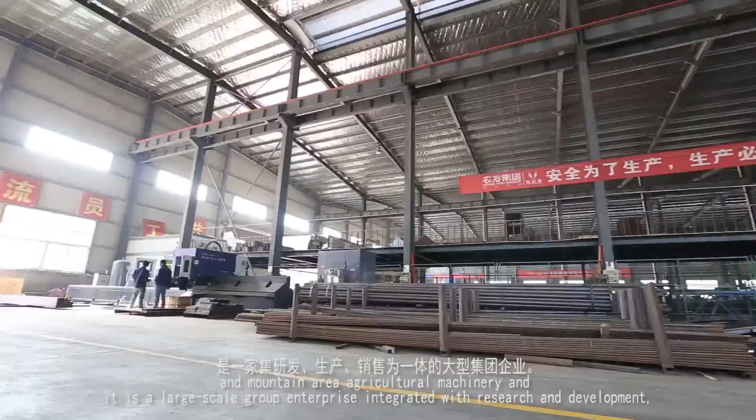Hunan Nongyou Machinery Group Company Limited is located in Shuangfeng County, Loudi City with beautiful landscape, a remarkable place with outstanding people, the hometown of generations of talents such as Zeng Guofan and Cai Hesen. Established in 1995, the company is positioned in hilly and mountain area agricultural machinery, and it is a large-scale group enterprise integrated with research and development, production and sale.

4 subsidiaries such as Nongyou Company Limited and Nongyou Shantai are incorporated under the group. An average annual sales revenue in recent 3 years keeps a growth of 30% or so.

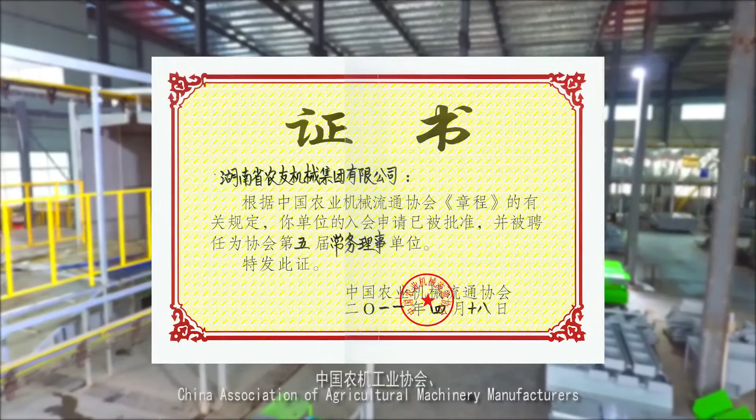Nongyou Group is a key enterprise in Hunan agricultural industry, key new high-tech enterprise of National Torch Plan, an enterprise for demonstration of National Industrial Enterprises brand cultivation, a member of State Agricultural Machinery Standardized Committee, and executive member of China Agricultural Mechanization Committee, China Association of Agricultural Machinery Manufacturers, and China Agricultural Machinery Distribution Association.

On New Year's Day of 2012, Liu Ruoqiao, president of Hunan Nongyou Machinery Group Company Limited, was invited to participate in Economic Operation Forum convened at Shantan and presided by Premier Wen Jiabao as the only representative of Hunan Agricultural Machinery Enterprises.

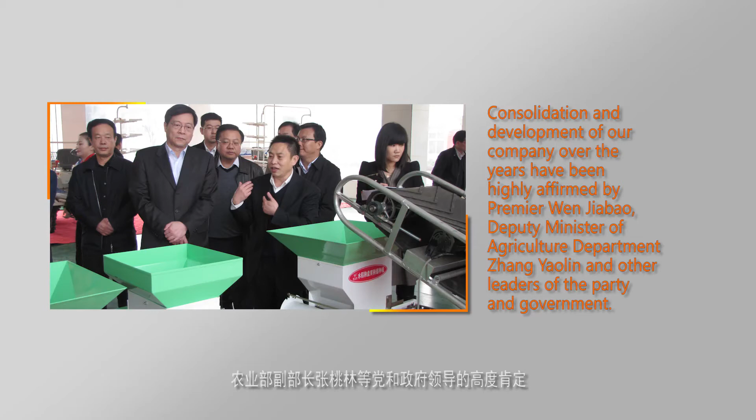Consolidation and development of our company over the years have been highly affirmed by Premier Wen Jiabao, Deputy Minister of Agriculture Department Zhang Yaolin, and other leaders of the party and government.

A good fortune, trademark of the company, was rated as China Famous Brand in 2012, and the product has won Hunan Product Quality Award, Hunan Famous Brand, and other honors.

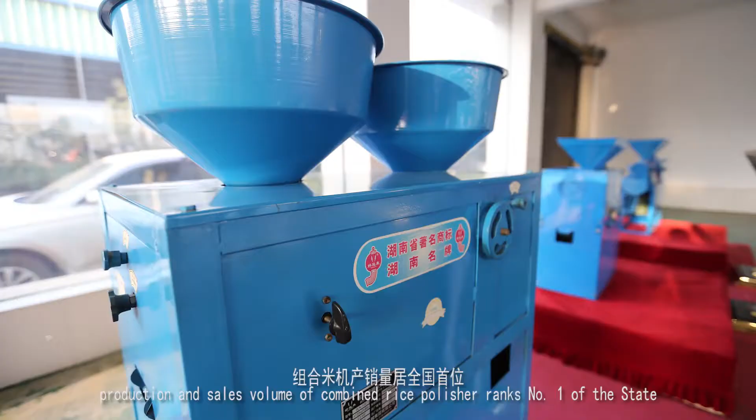The products are sold well in over 20 provinces and cities, as well as Vietnam, Thailand, Burma, Malaysia, Laos, and other countries and regions. Production and sales volume of combined rice polisher ranks #1 of the state, and production and sales volume of dryer and harvester ranks #1 in the province.

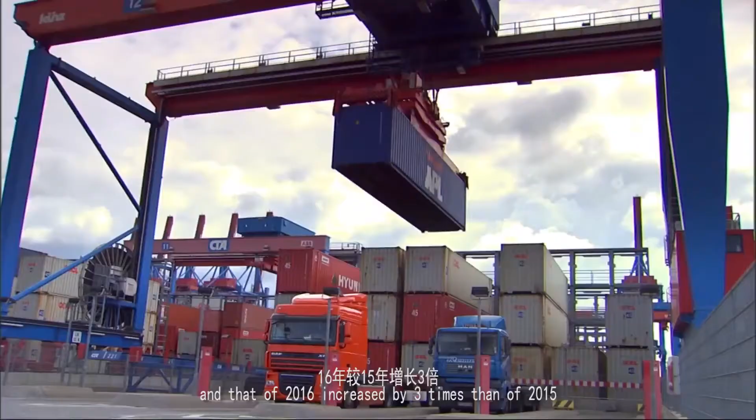Product export achieves great leap forward development. Export sales increased by 10 times in 2015, and that of 2016 increased by 3 times that of 2015, in excess of $10 million, wherein self-support export was of $6 million.

Technical Center of the company is certified as State-Level Enterprise Technical Center, National Worker Pioneer, and one of the Enterprise Science and Technology Entrepreneur Team of Hunan Province, and the subsidiaries of Nongyou Company Limited and Nongyou Shantai are both new high-tech enterprises of Hunan Province.

As of the end of 2016, the company owned 109 national patents, wherein 25 patents for invention, led or participated in formulating 2 national standards and 7 industrial standards.

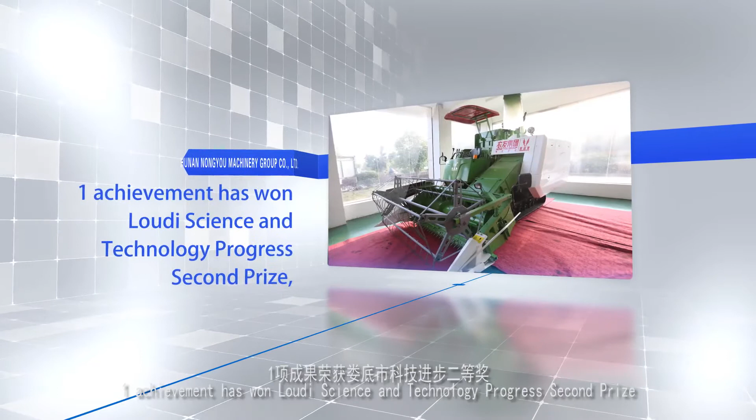32 technologies have passed national achievement authentication, wherein 8 have reached domestic advanced level, 2 have filled the domestic gap, 2 achievements have won Hunan Science and Technology Progress second prize. 1 achievement has won Loudi Science and Technology Progress second prize. 2 achievements have been listed into Hunan Industrial Area 100 Major New Products Boosting Plan projects. 4 technologies have been listed into the Guide Directory of Hunan Strategic Emerging Industry Major Key Common Technology Development.

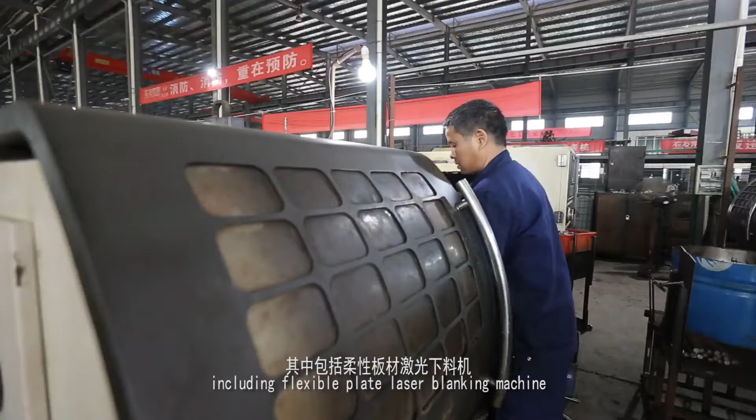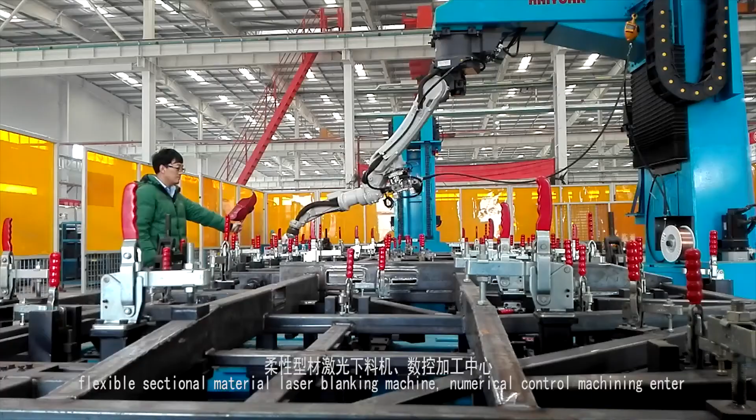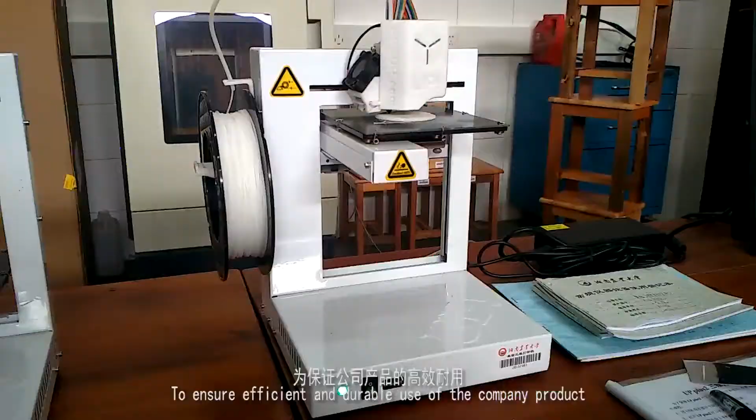The company possesses over 500 sets of high-end advanced production equipment, including flexible plate laser blanking machine, flexible sectional material laser blanking machine, numerical control machining center, flexible robot welding system, environmental spraying production line, flexible general assembly production line, and other equipment. To ensure efficient and durable use of the company product, the company has jointly built metallographical 3D printing and model verification laboratories.

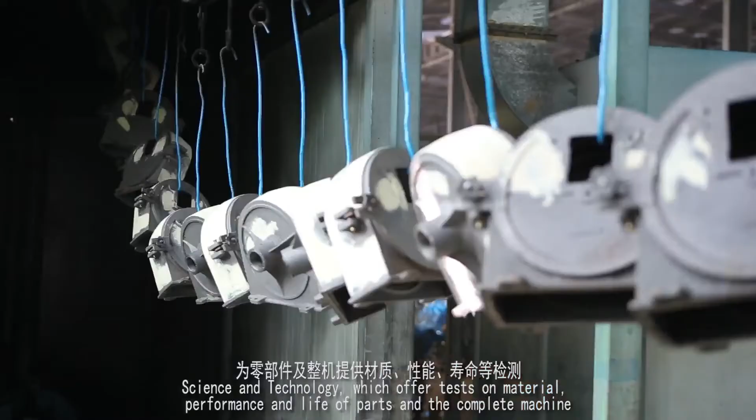Mechanic structure, reliable life, and other laboratories were jointly built with Agricultural University of Hunan and Hunan University of Humanities, Science and Technology, which offer tests on material, performance and life of parts, and complete machine.

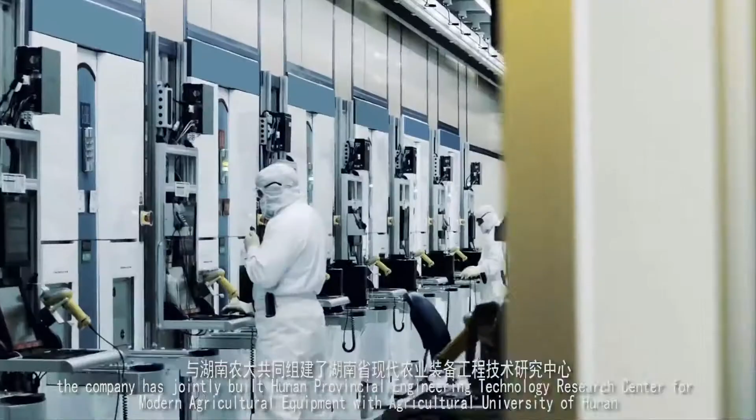Insisting in university-industry cooperation, the company has jointly built Hunan Provincial Engineering Technology Research Center for Modern Agricultural Equipment with Agricultural University of Hunan, and led to establishment of Hunan Loudi Agricultural Machinery Technology Innovation Strategy Alliance, and set up a close cooperative relationship with Chinese Academy of Agricultural Mechanization Sciences, South China Agricultural University, Hunan University, Agricultural University of Hunan, Central South University of Forestry and Technology, Agricultural Machinery Identification Station of the province, and other colleges and universities and scientific research institutions.

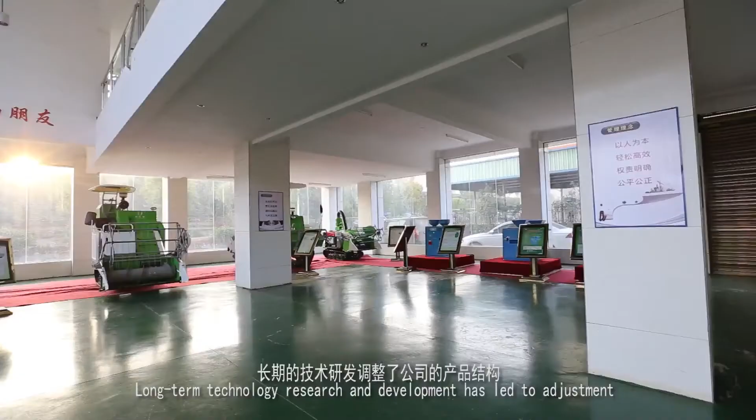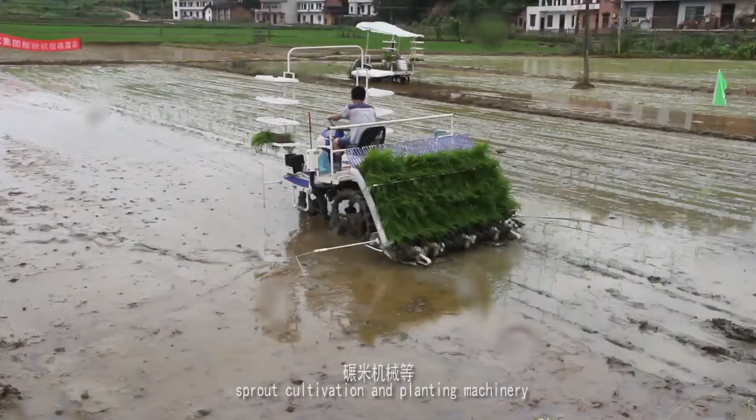Long-term technology research and development has led to adjustment of product structure of the company and has formed mechanized series products covering whole course of rice such as farming machinery, sprout cultivation and planting machinery, harvesting machinery, drying machinery, rice milling machinery.

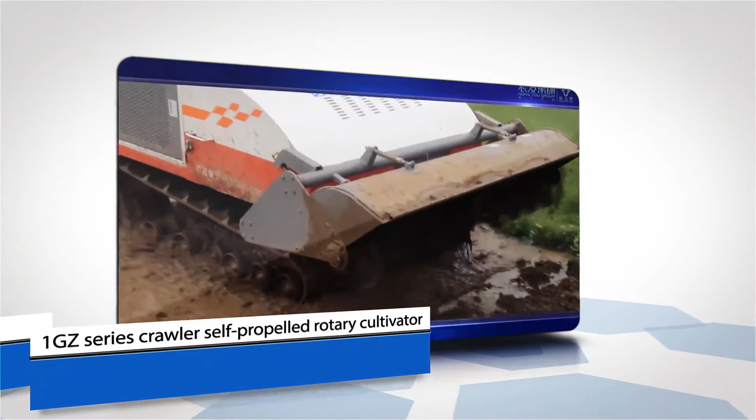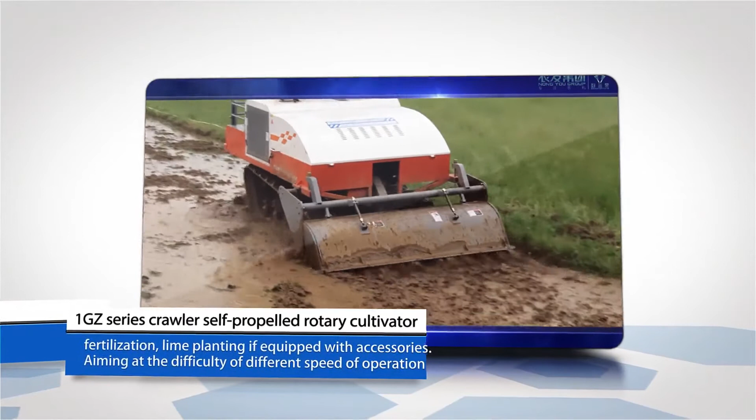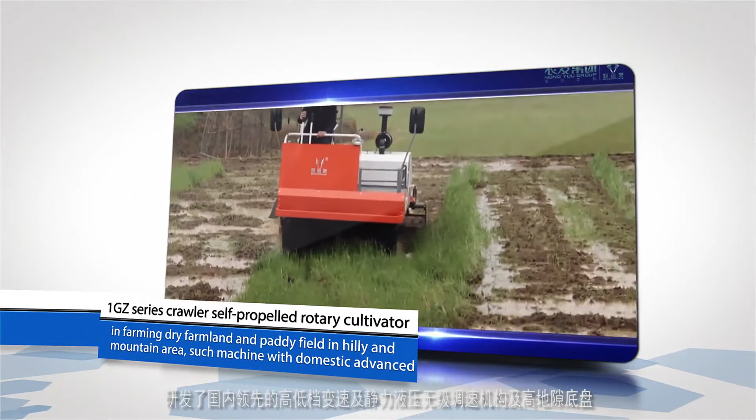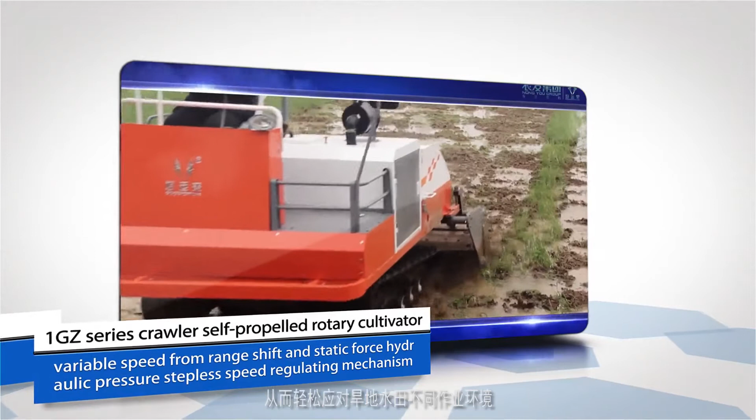The 1GZ series crawler self-propelled rotary cultivator is mainly used for reclamation, weeding and grassland regeneration farming of paddy field and dry farmland, and it is available for operations of ditching, riding fertilization, and lime planting if equipped with accessories, aiming at the difficulty of different speed operations in farming dry farmland and paddy fields in hilly and mountain areas. Such machine, with domestic advanced variable speed range shift and static force hydraulic pressure stepless speed regulating mechanism...

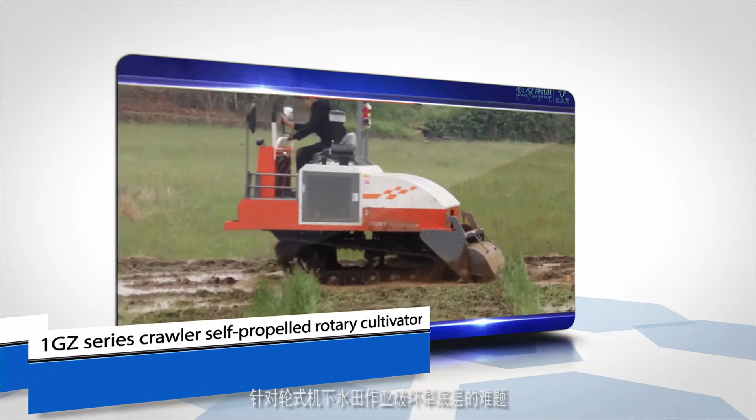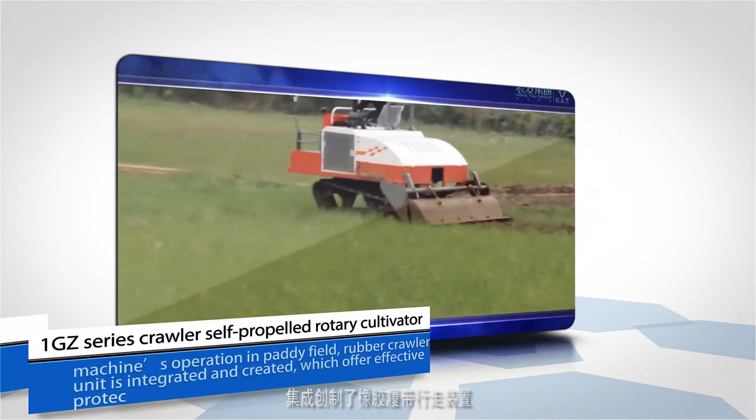...and high ground clearance chassis is developed, so that different operation environments of dry farmland and paddy field can be easily dealt with, aiming at the difficulty of plow pan being damaged from wheel-type machine operation in paddy field. A rubber crawler unit is integrated and created, which offers effective protection on the plow pan.

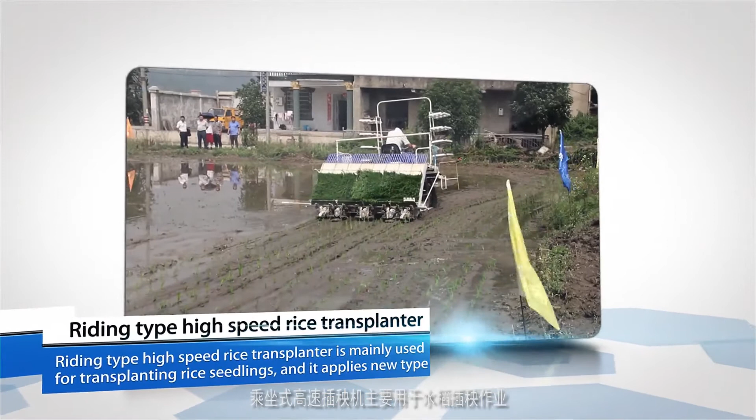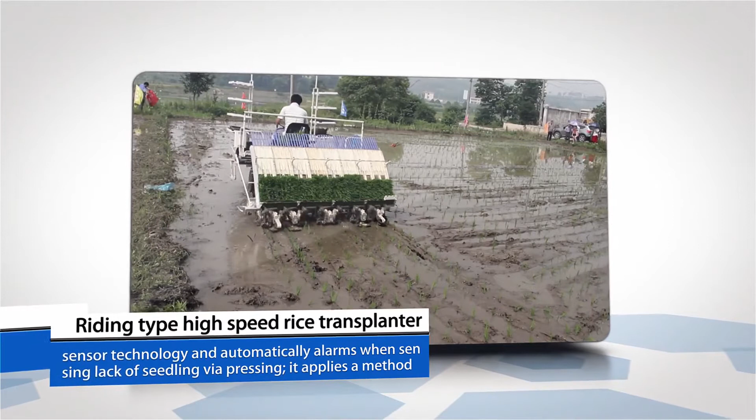The riding-type high-speed rice transplanter is mainly used for transplanting rice seedlings, and it applies a new type of sensor technology and automatically alarms when sensing lack of seedling via pressing. It applies a method combining movement and fluid simulation.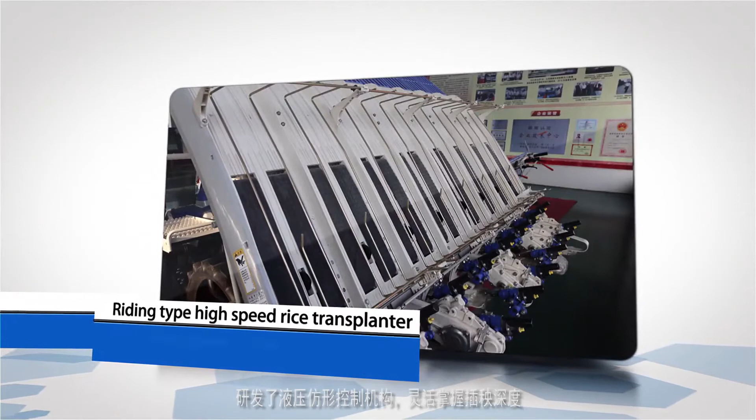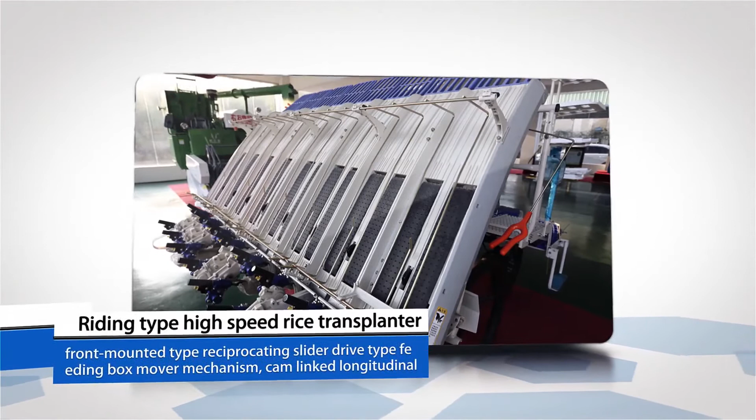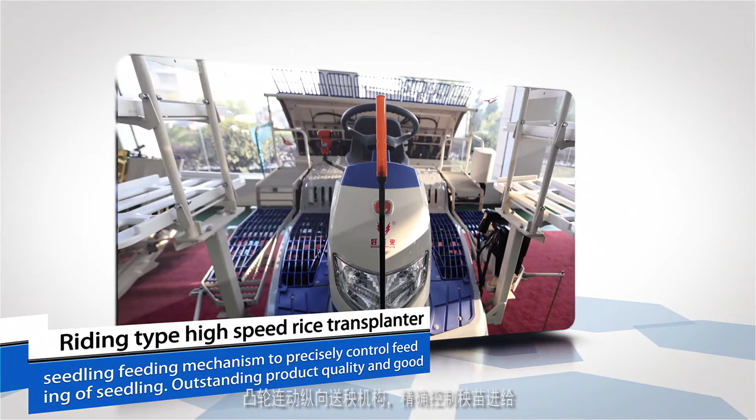A hydraulic copying control mechanism is developed to flexibly master rice transplanting depth. It applies a movement simulation design method and is equipped with a front-mounted type, reciprocating slider, drive-type feeding box mover mechanism, and cam-linked longitudinal seedling feeding mechanism to precisely control feeding of seedling. Outstanding product quality and good product performance are very suitable for large area operation.

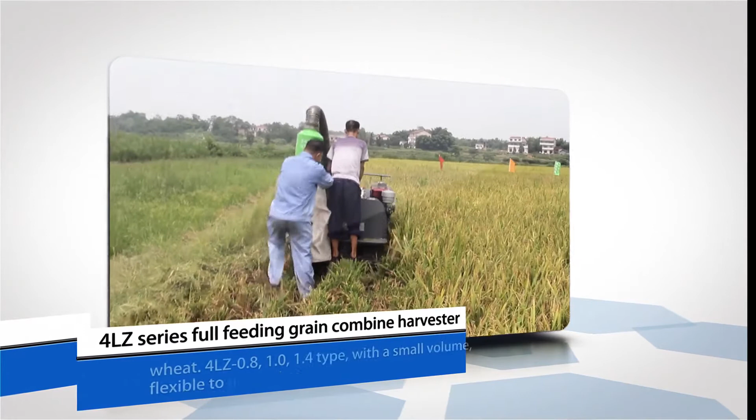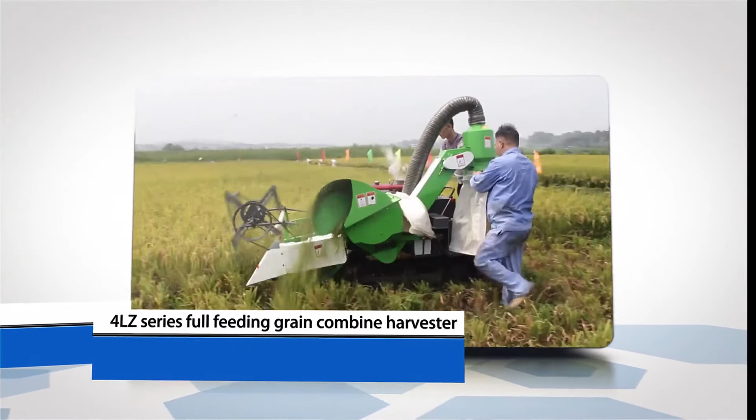The 4LZ series full-feeding grain combined harvester is mainly used for operation of harvesting rice and wheat. The 4LZ 0.8, 1.0, 1.4 types, with small volume, flexible to use and convenient to transfer, are very suitable for operation in small parcels of rice field in hilly and mountain areas.

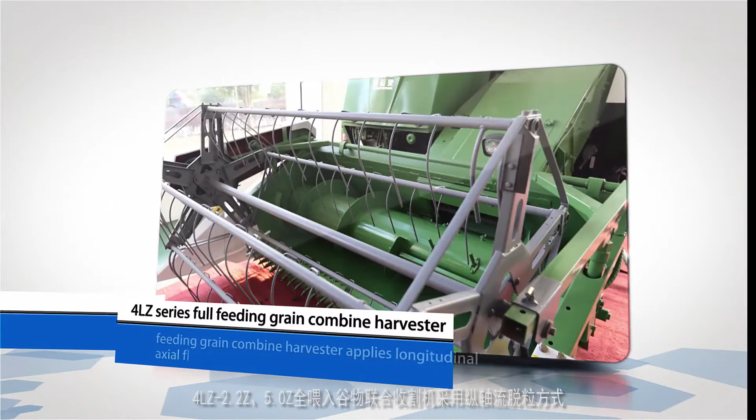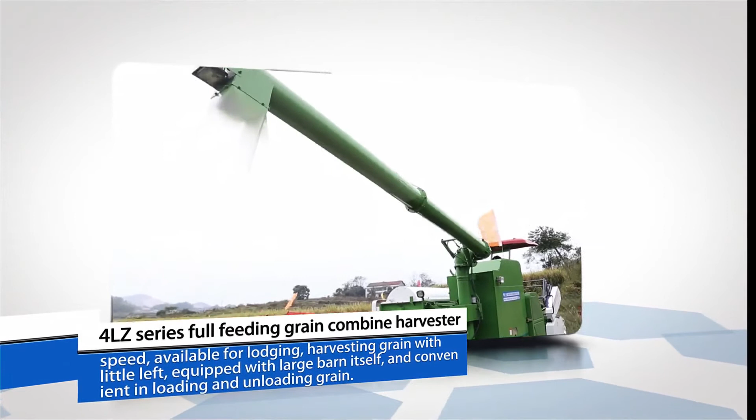The 4LZ 2.2Z 5.0Z full-feeding grain combined harvester applies a longitudinal axial flow threshing method with fast harvesting speed, available for lodging, harvesting grain with little left, equipped with a large barn itself, and convenient in loading and unloading grain.

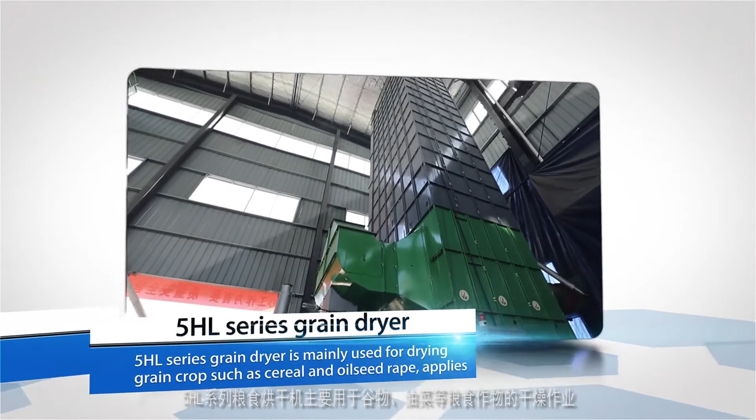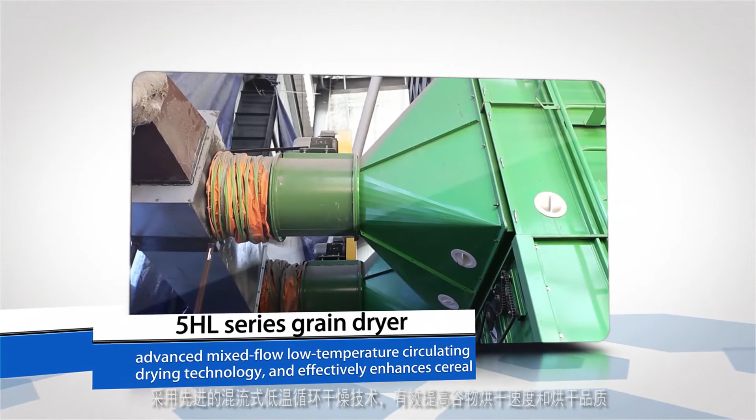The 5HL series grain dryer is mainly used for drying grain crops such as cereal and oilseed rape, applies advanced mixed flow, low temperature circulating drying technology, and effectively enhances cereal drying speed and drying quality.

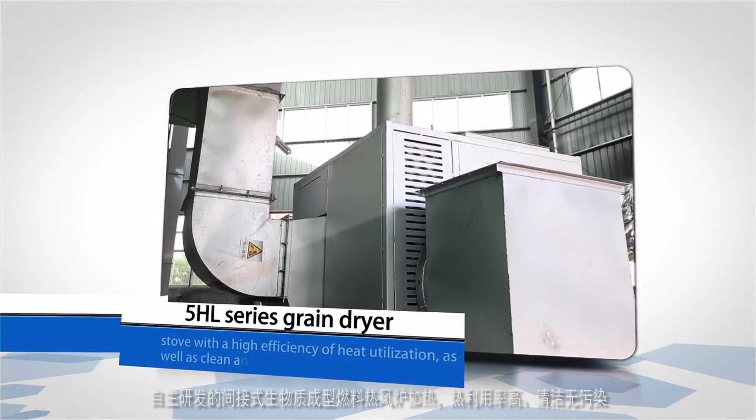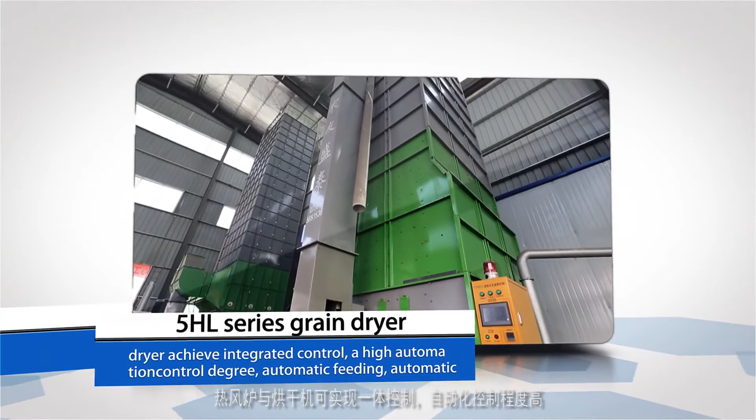Heated by self-developed indirect type biomass briquette hot blast stove with high efficiency of heat utilization, as well as clean and pollution-free operation, the hot blast stove and dryer achieve integrated control with a high degree of automation: automatic feeding, automatic temperature control, automatic drying, online supervision, and unattended operation.

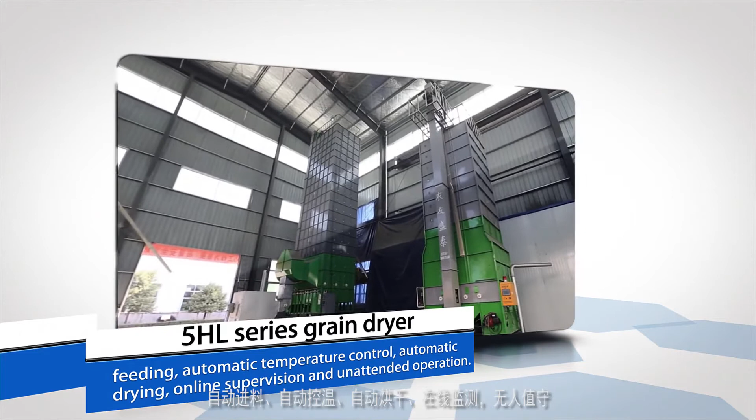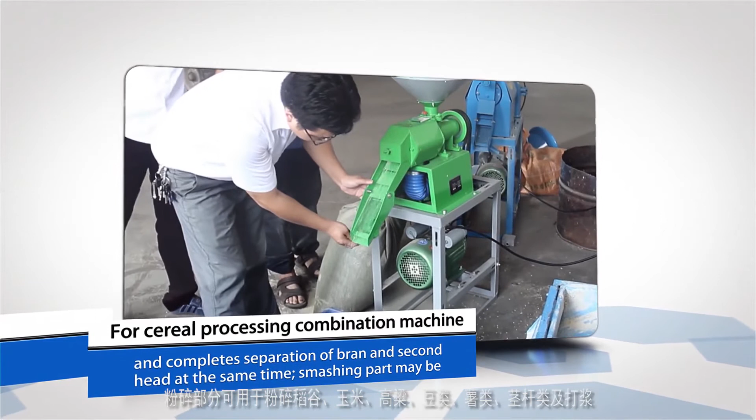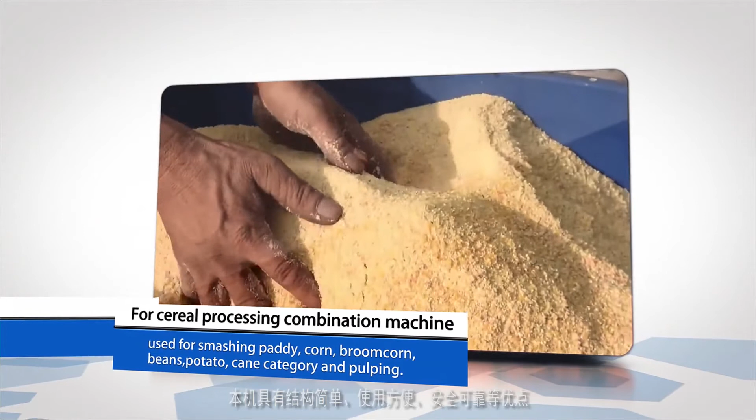For the cereal processing combination machine, the rice milling part processes paddy into rice in one time and completes separation of bran and second head at the same time. The smashing part may be used for smashing paddy, corn, broom corn, beans, potato, and cane category, as well as pulping. The machine has many advantages such as simple structure, convenient use, safety and reliability.

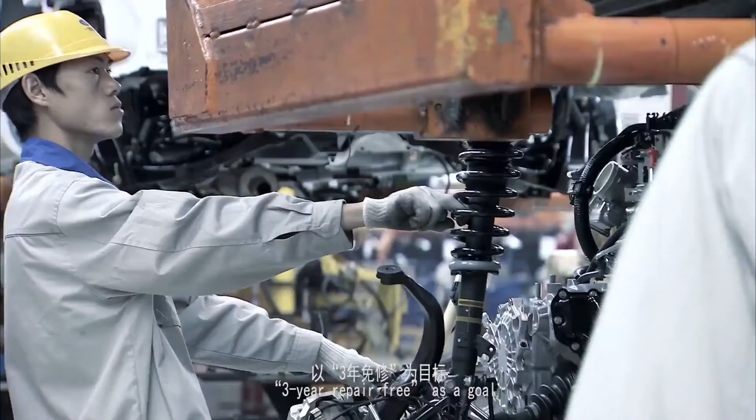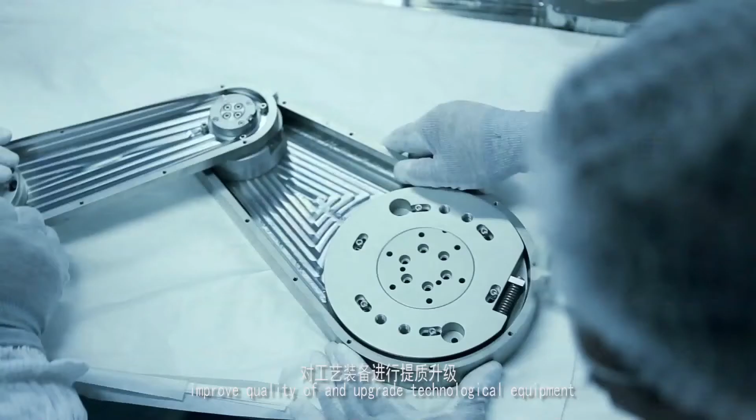In planning for the future, the group will take Made in China 2025, implemented by the state, as an opportunity, with good quality first as the principle, intelligent manufacturing as the principal line, and 3-year repair-free as a goal. We will manufacture agricultural machinery with the same principles as producing automobiles, improve quality and upgrade technological equipment, and achieve intelligent manufacturing gradually, always taking the customer as the focus of attention.

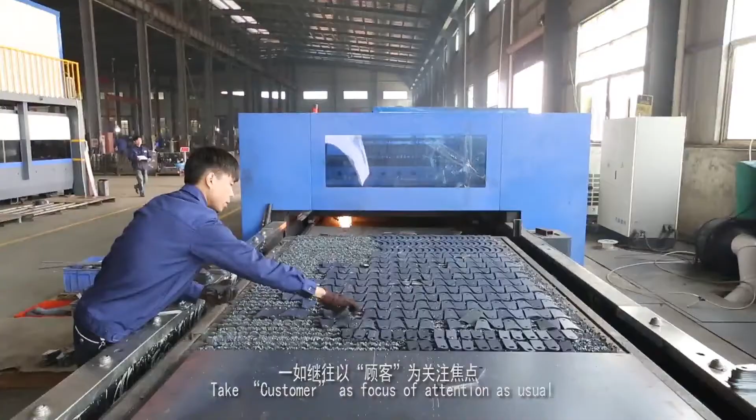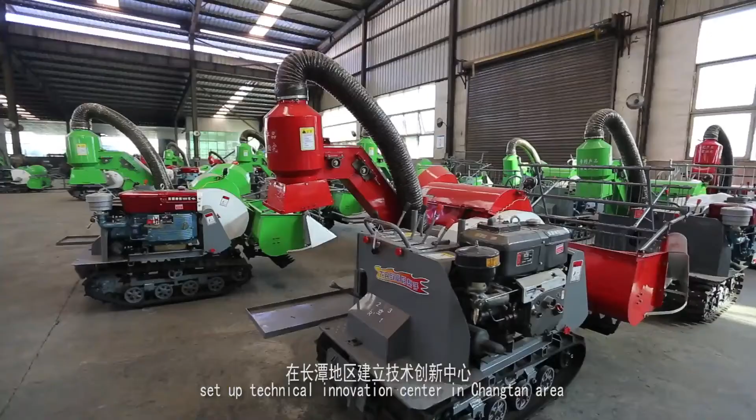Make continuous improvement. Promote customer satisfaction constantly. Develop an e-commerce platform, realizing the integration of three networks: the e-commerce network, the traditional distribution network, and the after-sales service network. Expand foreign investment and propel product export. Continue to strengthen investment in research and development, develop intelligent products, create a simulation laboratory, set up a technical innovation center in Changtan area, forge a state-level innovation center, and drive the enterprise to have good and rapid development through innovation.

20 years of breaking through, opening a way through brambles and thorns, imprinting a series of unforgettable footprints. 20 years of unsurpassed striving and endless innovation. 20 years of accumulation and sufficient confidence. Nongyou's people live up to history in retrospect. Looking into the future, a 100-year road stretches in front of Nongyou's people. Nongyou is forging ahead towards the ambitious goal of being a pacemaker in hilly and mountain areas.